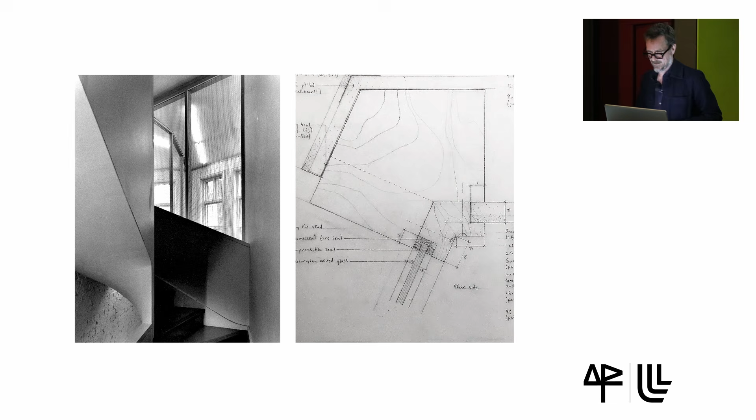It was also a project which was about the city, because this is a site sitting on a high street in Clerkenwell, but by lighting the ceiling in a certain way in the direction of the plot, you can see from the street that the plot is at an extreme angle from the street itself. In other words, the interior describes the consequence of the urban block being quite distorted.

And in the interior, a mixture of glass and mirror with these lights create a very complex upper level with a very concentrated lower level. Views of the street, views of the outside are mixed with views back into the space. It becomes a very complex place in a very small project.

So back in 1997, when that project was made, reuse wasn't really a word, an expression that we knew. The attitude to the environment was an inbuilt feeling of how to work responsibly. Not like today, where it's an obsession.

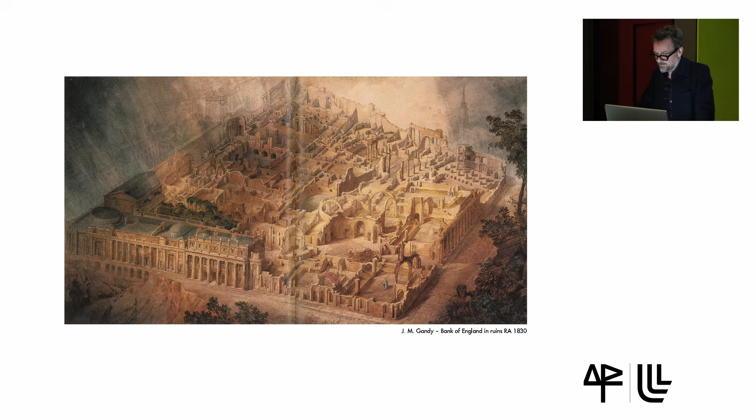We need as architects to define a conceptual frame in which to understand what your reuse project really is. And historically, approaches to reuse or transformation or restoration, Umbau, let's say, have reflected wider ideological attitudes. I personally think it's really important to understand the origins of things as an architect, because I find it helps me understand my position within a cultural debate. Not just about the local argument, but to understand that we are part of a big continuity of cultural ideas.

And in the 1850s, John Ruskin advocated conservative restoration. He was ideologically opposed to reconstruction. He believed that protection was a better strategy. Ruskin defended the aesthetics of the ruin, the patina of weathering and collapse. He saw restoration as a destructive force that effaces the sublime effects of time. It's a position that relates very strongly to the picturesque. The picturesque I have in my bones, you know, because of my Anglo-Saxon heritage.

This is a painting by J.M. Gandy of John Soane's Bank of England. John Soane was the third architect who, over a period of nearly 30 years, added and adjusted this huge urban project in the middle of the city. But he enjoyed presenting this institution of power as a ruin.

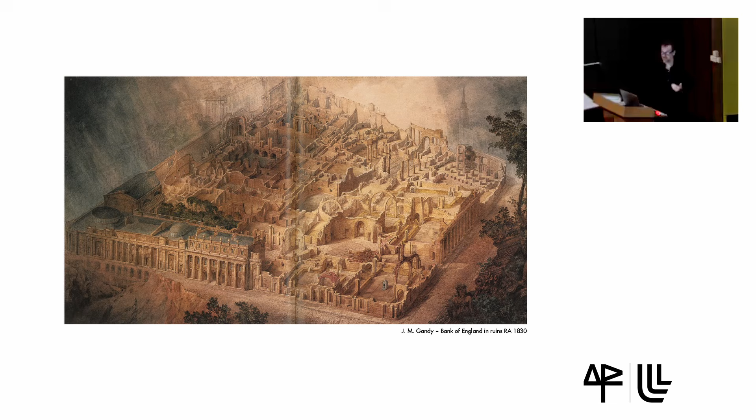I think I have this instinctive affinity towards the picturesque because I'm from London, and London is a city that is really fundamentally rooted within ideas of the picturesque and also conversely the mercantile. There's this interaction between the formal and the informal, and the attention paid to a sensorial experience rather than rationalism. The picturesque movement, by the way, emerged as a reaction to French rationalism.

The sort of empirical absolute truth of French rationalism was, as always in the history of architecture, you know, someone says this and 10 years later someone says the opposite. And picturesque was presented as another way of seeing the world, in a rather more naturalized, albeit composed, naturalized way.

But continuing with this historical step by step, around the same time, of course, the famous argument or debate with John Ruskin was with Eugène Viollet-le-Duc, who championed creative restoration. This was a way of re-establishing a building's finished state, whether it had ever actually existed at all. The addition of new layers was allowed in his doctrine, as long as they were an expression of their own time. So in the many projects he made, restoring churches, he advocated that it was important to express the new work as some kind of representation of the moment it was designed.

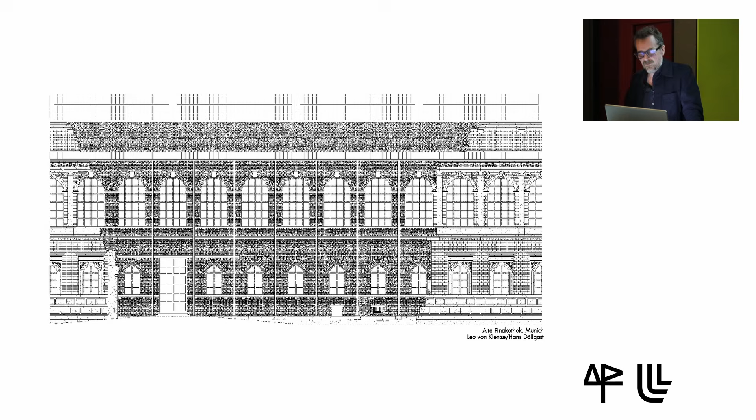Hans Döllgast's interpretive reconstruction proposed a subtler approach. These are drawings of my students actually, but this is Munich's Alte Pinakothek, a building that I'm sure you know, and if you don't, you should. Originally designed by Leo von Klenze, a big architect in the 19th century who built so much of Munich. The gallery, it was a museum, of course, was partially destroyed in the war, and Döllgast was commissioned to reconfigure and, in a way, repurpose the building.

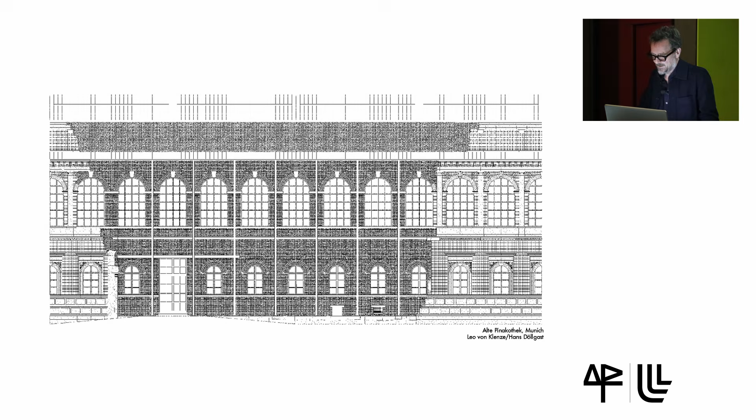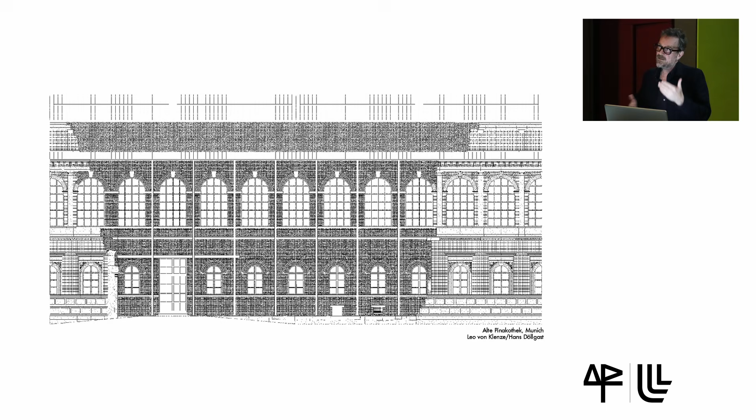Germany had almost no economy after the war. So this is the best that you can do, reusing bricks, using steel pipes for columns, establishing, you could say, the best possible relationship between a grand, noble classical architecture and where the German economy was then.

And yet, within the city, the building seems to be the figure that is known, that was known. So the project somehow becomes a memorial to destruction, or rather, it's both that and a historical reproduction in a certain way. But he protects and makes sense of all the layers of the building's life. And as a result, a new building emerges from the remains of the old, the old that includes its history. So the building stands as a sort of witness to all its past, whatever has survived.

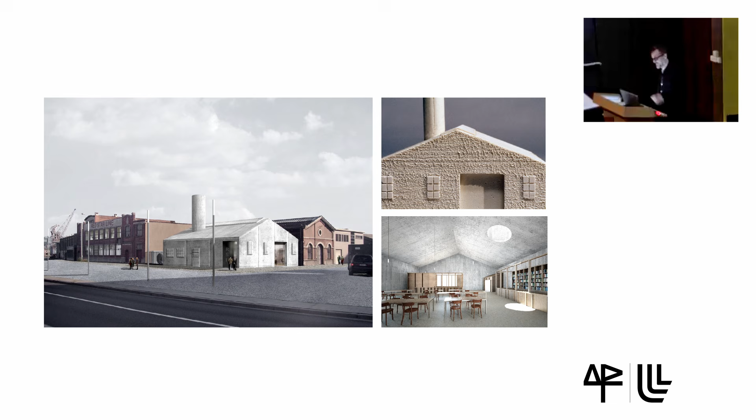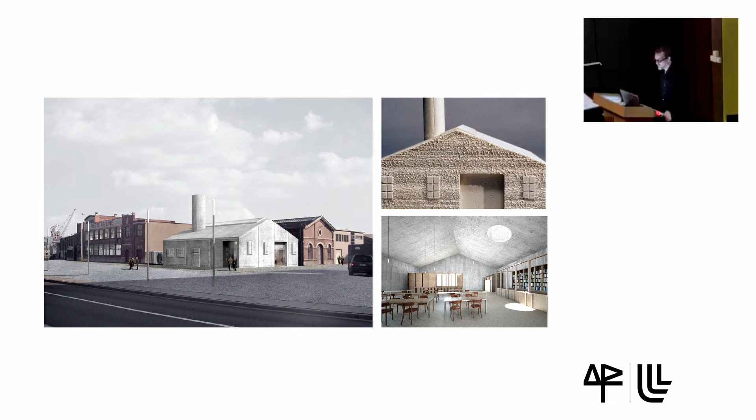Three buildings you can see on the left-hand side. But in the foreground, you see a shed, in fact a shed in concrete. All the buildings were listed, they were protected. But this building was literally falling down. There was rain and air running through. And our idea to restore the project was to cast the existing building against concrete and then dismantle the existing building. So on the right-hand side, you see the facade, where, of course, there's a very strong influence of Rachel Whiteread's work. And on the right-hand side, you see the interior of that space.

The old chimney became a light well. This became a kind of social space. It was exploring the idea of casting at every level. So casting a building, but also casting furniture. This is a space that had to be, let's say, a permanent memorial to the past, but also a space for appropriation of events and performances and things like this.

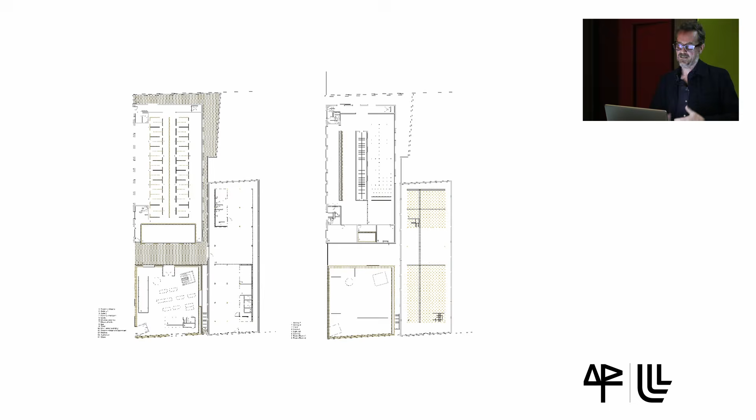I won't talk in great detail, but to point out that from our point of view, everything that we added would be a cast. And so that meant the building scale, but it also meant the level of infrastructural furniture. So for example, on the left-hand side, you see a concrete cast bench that was both reminding the visitor of the sequence of events the emigres would have to go through in the process of being checked, but on the other hand became a kind of background to a number of new uses.

Another project in 2002 was the renovation of the Upper Lawn Pavilion, a weekend house of Alison and Peter Smithson. Very important project to us and to many others, it seems. But there, when tasked with how to restore the building, we had to dismantle the building piece by piece and then remake it.

And from early conversations about adding double glazing and replacing materials, came a project that did none of those things, but literally took things down, cleaned, removed the elements that had been added over years by other owners, replacing the glass with single glass but higher energy efficiency, integrating heating in the floor that you couldn't see. In other words, we tried to make it, or we did make it more comfortable, but our work was completely invisible.

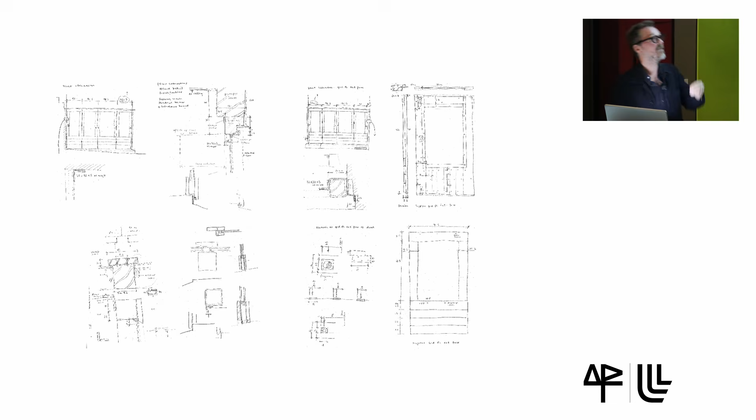But what I find interesting about the project is, here the sketches, how much we learned by dismantling a building. For example, we learned on the right-hand side, when we started to draw the doors and started to take them apart, we noticed that the doors are very conceptually considered. So unlike a standard door that would have a solid frame with a rebate, the whole door is made of 2 planes, and one plane is just shifted from the other to create that stop.

You know, it's nothing to do with old craft. It's to do with modernistic ideas, contemporary ideas of how to put things together. Very interesting and exciting, many things that we learned on this project.

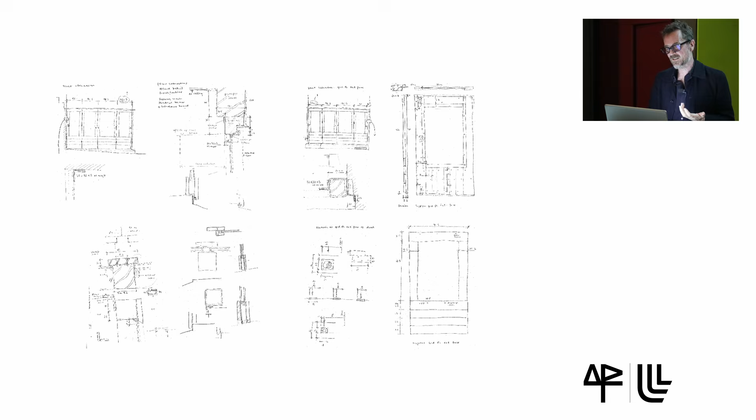But when it came to the decisions about what goes and what stays, I revisited the building recently, and I was given access through Drawing Matter, the drawing archive, to all the drawings that were made for this project. And it reminded me that we made decisions about what we kept and what we didn't, and how we organized things in a way that was a sort of fiction.

You know, we chose a sort of time of the life of the building that we converted it back to, but then we changed a few things here and changed a few things there. In other words, we invented a completely new narrative for the project. Not so consciously, but instinctively.

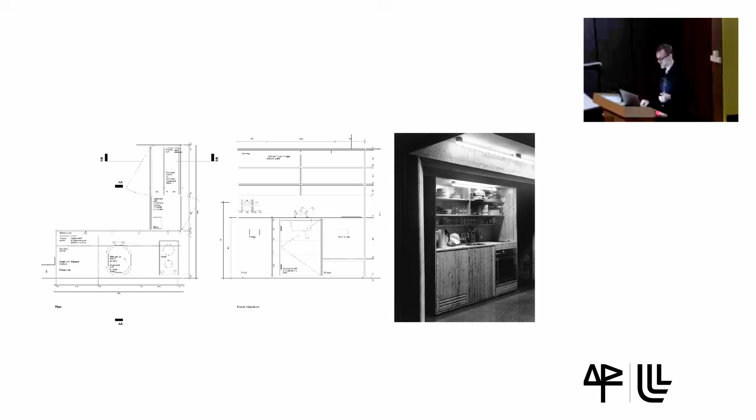We had to add new furniture that was made in tri-board, sort of strong plywood, that reflected something of the old, but was constantly adjusting itself to its new use. And then we made this table that was a real representation of a social space that was a very important part of the daily life of the building.

I want to show 4 projects. And in the background, I want just to say that if you're willing to listen, buildings will whisper things to you.

Everything okay so far?

Good. Of these 4 projects, I'm going to show 2, say, smallish projects, 2 bigger projects, because I think this theme of transformation has a very strong connection to scale. This is the City Library in Blankenberge, in Flanders. It was actually the first project that we were successful in competition in Belgium. It was the beginning of a very beautiful relationship, which continues today.

The City Library existed by the railway station, and there was an old school building that was much loved. Blankenberge had a very unfortunate relationship to Ostend, because Ostend was heavily bombed in the war. And when the German bombers, and indeed the English bombers, wanted to get home and fly fast, if they hadn't dropped all their load, as they turned to head back, they dropped the rest of their bombs just so they could fly faster. And a lot of them landed in Blankenberge.

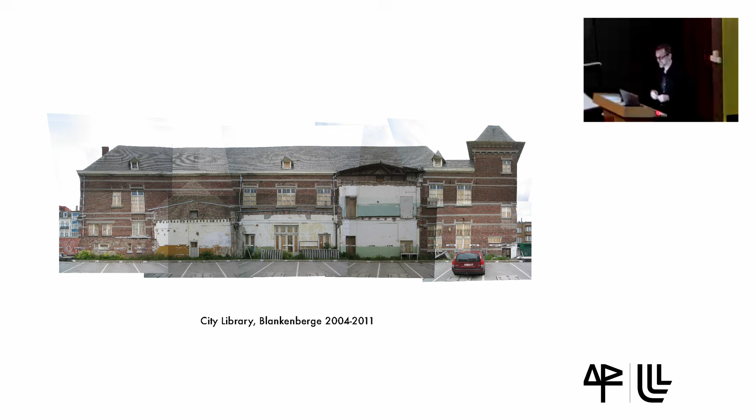So poor old Blankenberge, which is a very sort of sleepy seaside town, got absolutely destroyed in the war. Really sad story, but by the way, just another reality that no one ever talks about. The consequence is that there were fragments left in the city, and this building, which was a well-loved school, its noble facade, which was heavily protected, remained, but the buildings either side of it in the street were destroyed, and the space behind was removed completely by bomb damage.

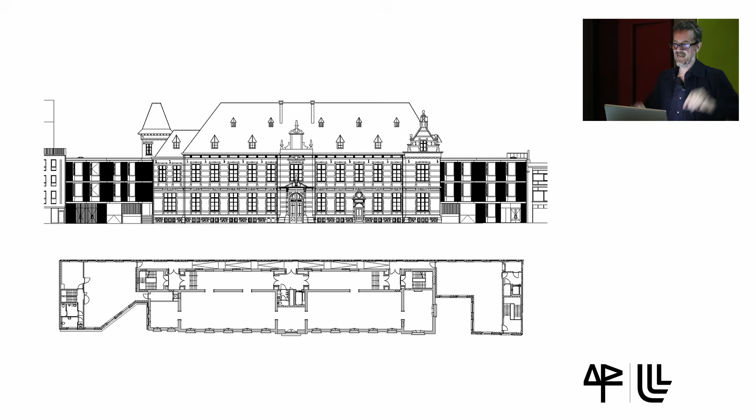Here is the plan. You can see at the back the ramps that link and connect the central lobby and then these two cores. And on either side, you see that we added two buildings that have the scale of the street side; they create the two heads of the circulation space at the back.

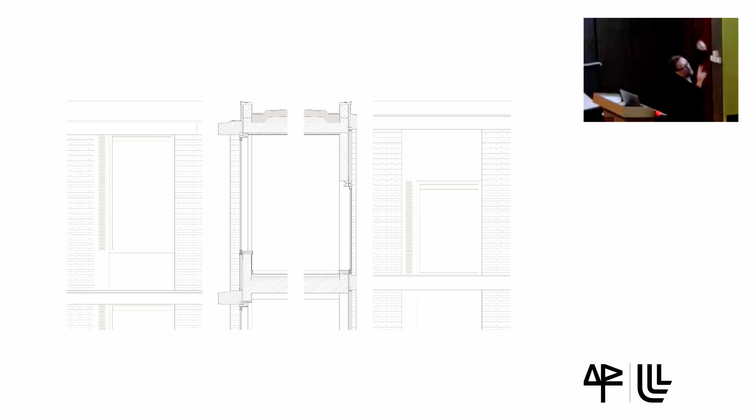So on the left-hand side, you have a very compressed facade, and on the street face, facing the city, those same elements are just pulled apart to give greater depth. So it's the same components, but the spacing is a bit different. I thought there was a section. Oh, can you see that? Yeah. There you can see on the right is the back, on the left is the front. The consequent differences, and you can see that the window is just turned upside down.

Now, this is a device to deal with the fact that the levels were completely different across not only the existing building, but the new buildings that we added had to provide access for the car park, and so had headroom issues which didn't meet the levels of the existing building. So this device of the ramp plus this treatment of the facade gave us continuity of the facade that relates to the historical facade, but at the same time, the level of the interior is able to be accommodated. So it's a very tolerant idea of a facade.

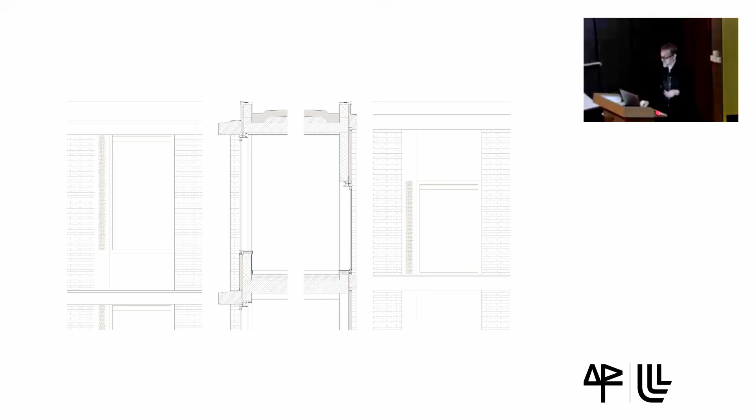On the interior, these are the existing spaces on the right-hand side, our work. We understood that the interior was a noble shell, and our first task was to reinstate a certain character that, let's say, the citizens of Blankenberge might recognize from their memory of this very important main school building in the town.

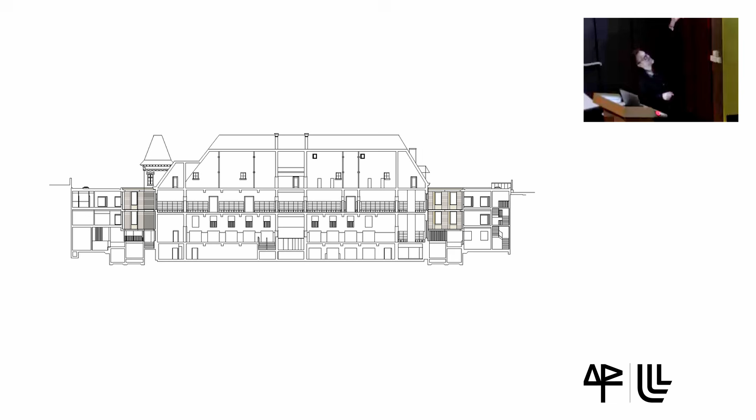And it was organized by using the roof space for the non-fiction department. The fiction was on the first floor, ground floor was public reading rooms, and the basement was an auditorium and storage, with offices for the librarian here and a children's library in the other new building. You can see how we just reappropriated what was there.

And you can also begin to see on the left-hand side that the idea of a library was always slightly secondary in our mind. The first step was to reinstate the noble character, and the next job was to make it a library. But we always imagined that the library was a transient use. It was the reason for the competition, but we were making a building for 150 years.

And I'm not sure if a library will be like a library that we know in 150 years' time. So the only thing that's fixed is this piece of furniture here. The rest of the library is added in lightweight pieces. So in a way, it feels temporary.

On the ground floor, this is the entrance space. And you have a combination of light, filigree curtains, handwriting, that is a very low scale, in a very big building. When you sit in the window seat, you look to your right, and there's some words written, poetry from a local artist, a local poet. Just a small moment between you and the building. No one else knows you're there, that's it. There's a moment of intimacy within this kind of large project.

The second project of that similar scale is a refurbishment of a very complex set of buildings to make an undergraduate business school in the East End of London. We call it Hult because this is the name of the owner of the school. The project really was about appreciating that everything is relevant. So on the left, that's the existing.

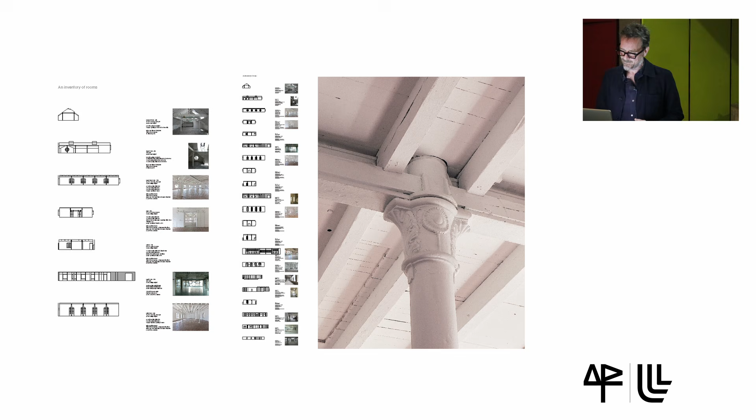And we show this picture on the right because there's an incredible physicality to this building. There was a cast iron structure, timber floors, everything painted, over painted, layer upon layer. And we said to ourselves, the school is there. We just need to allocate uses to the different rooms. But how do we intervene? How do we approach the idea of adding? Because it has to have furniture and classrooms.

And we were inspired by the idea of carpentry, meaning that everything we placed in the building would be made of carpentry, sawn. And depending on the scale of the piece, the finish and the detail would be appropriate. It reminds me of these beautiful pews, the beautiful furniture that you see in paintings like the Saenredam and others, that they're sort of insertions, they're pieces that are installed in a big space.

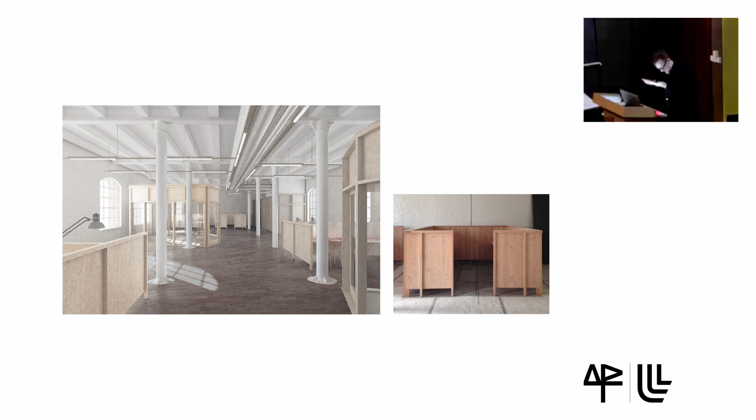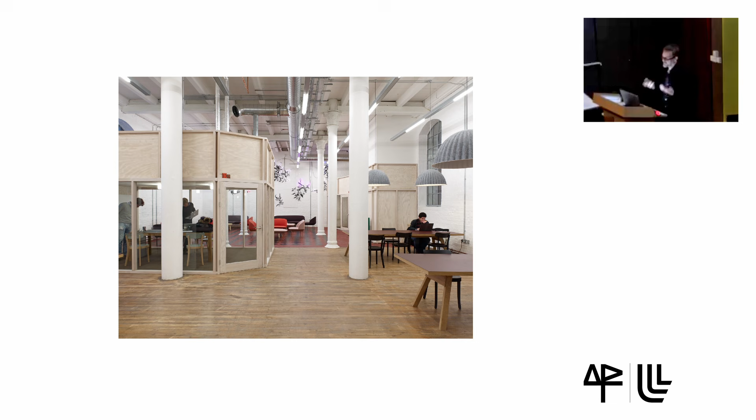So our idea was to do exactly that, to clean mostly the existing, to add some basic services only to the classrooms, which had to be climatized. But then to add furniture, like on the right-hand side, this is a prototype for a carrel where you do quiet study. The consequence was a sort of collage. And I must say, you could say bricolage. That's a very trendy thing to say. It was a few years ago anyway, bricolage.

There's a consequence with working like this. You have to be relaxed about form and actually enjoy the idea that things just come together, and that merging, that conglomerateness, has a certain quality. It actually takes a lot of thinking about too.

But here you can see, just as we knew that in the brewery there were large pieces of furniture, like we call them tuns, you know, the containers for beer and hops and water. And this is a building that was made for big pieces to be sitting inside it. So we added big pieces, rooms, studies, as a second scale after the scale of the building.

We inherited everything. So you see on the floor, it's a raised floor from an office with no carpet, and we just used that. And you can see the relationship between, on the right-hand side, what was the old office building and the brewery sort of stuff. And we added paint. Indeed, you may look here. This is a painted floor.

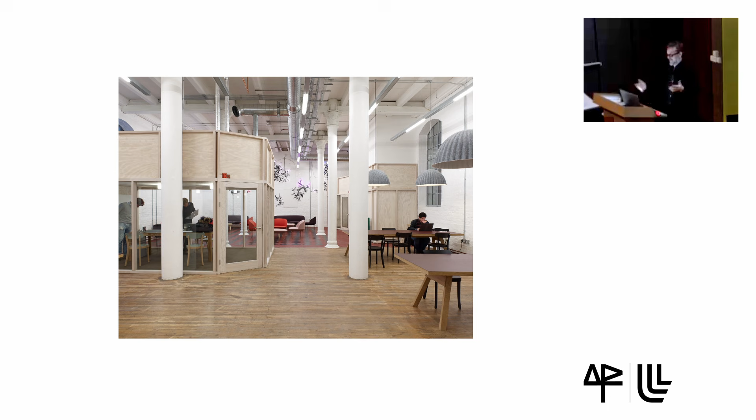What we discovered is that by making a template and using floor masonry paint on a big expanse of a really bad concrete floor, you create a certain scale, and it is a certain kind of quality. You can see another one at the back there, which was an existing red floor. We didn't paint the red floor, it was there, but we added a black square template, and in this case, a concrete floor that we added this white template.

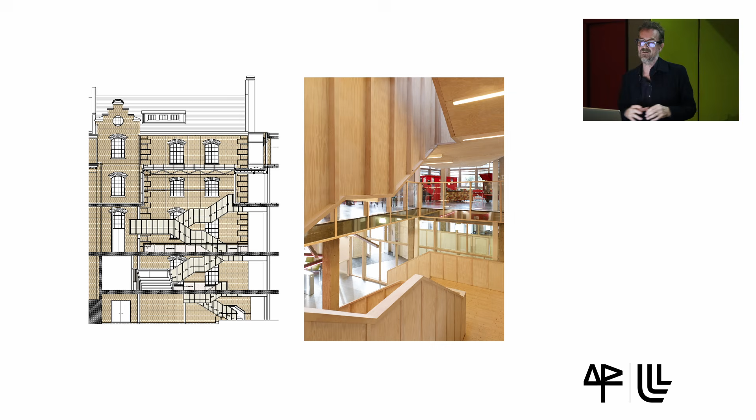The classrooms on the left were seen almost as buildings within the space, so they have elevations, windows. And on the right-hand side, the piece of carpentry that holds the whole project together, because the staircases were really hidden, is a new stair space. It's not just a staircase. The balconies are really broad. The wall of the stair is very high. So it's almost like you enter into a space and climb up the building. It connects all the floors that were never connected before.

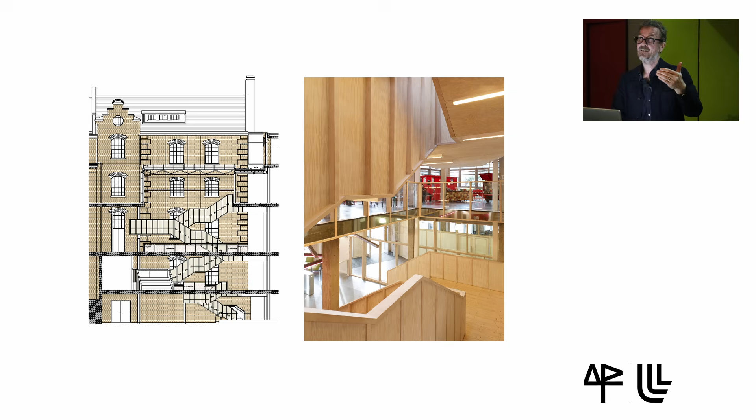And guess where it is? It's in the atrium that the Heritage Department wanted so desperately to keep as a sort of vitrine, to keep you away from the fabric of the brewery. And we managed to convince them that they should do the opposite now and bring the students close up, face to face with the existing building.

This light, this roof light, is an existing roof light that we lifted up by one story. It's all completely existing, but we just took it apart, lifted it up so that the stair could meet the top floor.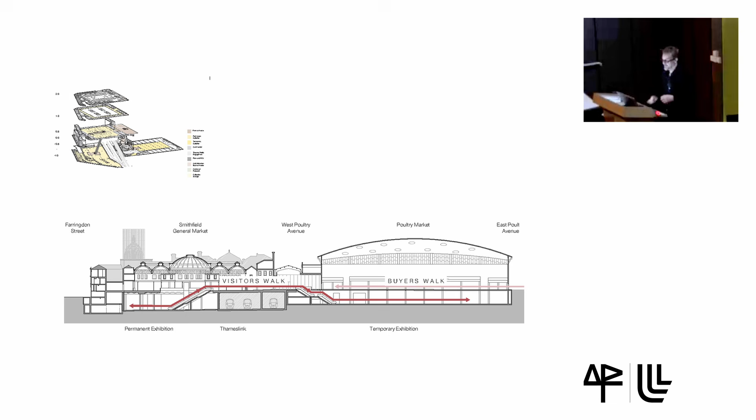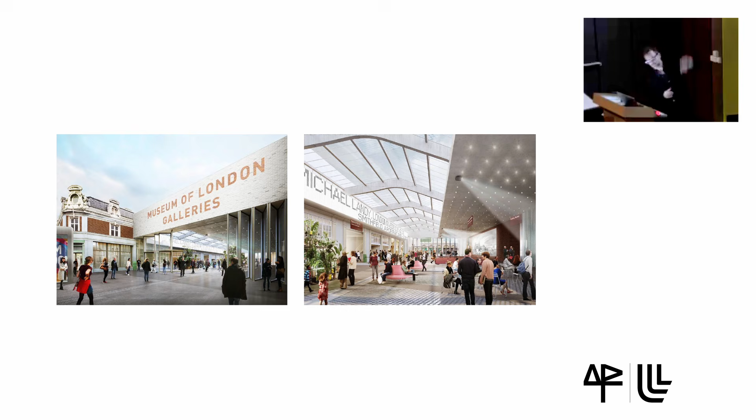Here you can see this extraordinary relationship of transport infrastructure, structural infrastructure, with the set of civic spaces and this important link. So the visitors' walk that would eventually extend into the next building was part of the axis character. This is the entrance, the new street. There's an extraordinary brick wall on the left that was just there. So, with the amazing abutment to the Victorian building, we kept that.

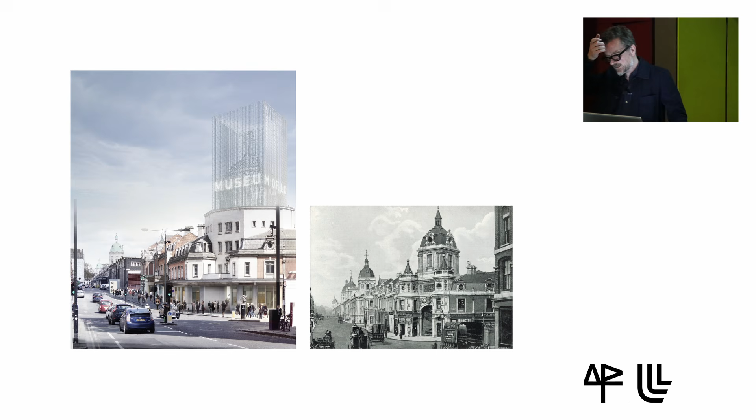And a museum needs to be seen. And we knew that we needed to find, let's say, some sort of landmark gesture. Otherwise, we wouldn't win the competition. BIG were against us. They didn't win either.

But on the right-hand side, you can see a cupola, because the original meat market had a series of towers, you know, marking the building. And the one on the right had been destroyed. You can see only the top of it was taken away. So we replaced it with a metal mesh with an installed LED assembly that would allow signage to happen day and night.

And indeed, because of the lighting, we could achieve a kind of kaleidoscope of movement and changes. So it became a kind of trace of what was there, but in the end, a kind of communication tool to spread to the broader aspects of the city.

The final project I wanted to show is a current project, the KANAL-Centre Pompidou in Brussels. It was a project that we won in competition together with two other offices, noA architecten from Brussels, and EM2N from Zurich. There was an international competition in which all of the entries were teams of architects because the project was so big. And indeed, the construction of the project is a team of contractors, two contractors working together to build such a large project.

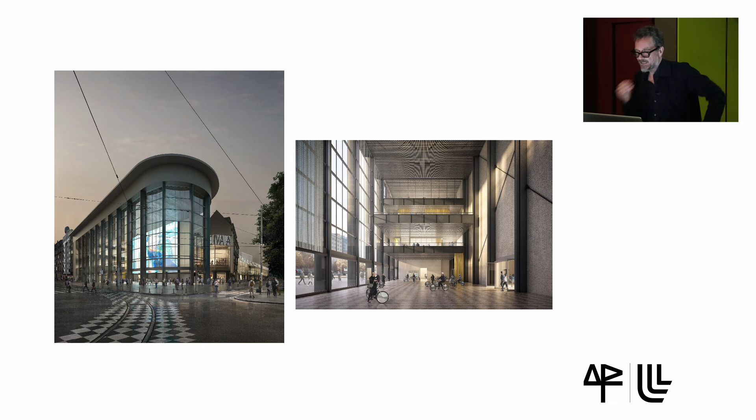I show it really to continue this point about how do you address transformation? It's not possible to imagine a single answer to the problem. Instead it requires a set of strategies that reinforce, in our opinion, the attitude of the existing building. This picture, in my mind, says a lot about the realities of reuse. To most people, we're reusing the existing building, but this is one of the spaces at the moment. Almost everything has to come off. And look at the extra structure, the infrastructure required just to hold the existing.

I show it because I think it's so important to have a kind of realistic idea of what reuse means. I find the topic a really interesting and challenging one, but nowhere near critical enough in what it really means, particularly at schools of architecture, where there's a sort of romantic idea of keeping everything as it is. And particularly in a public building, you simply can't do that. Our mantra was to touch the building as lightly as possible, to trust what was there. And I'll explain how we had to face the reality of that in a minute.

But at the heart of the project is this showroom. André Citroën moved his car manufacturing to Brussels as its headquarters. He bought the whole of the city block, apart from one building, and the back of the building was the garage in which they put parts together, and the front of the building was this showroom where he would display the cars on a main thoroughfare into the center of the city. And over the years, as the road itself was lifted to create a highway, platforms were added within the showroom, basically to lift the view of the car up. So when the road came up, you could see the car at your eye level.

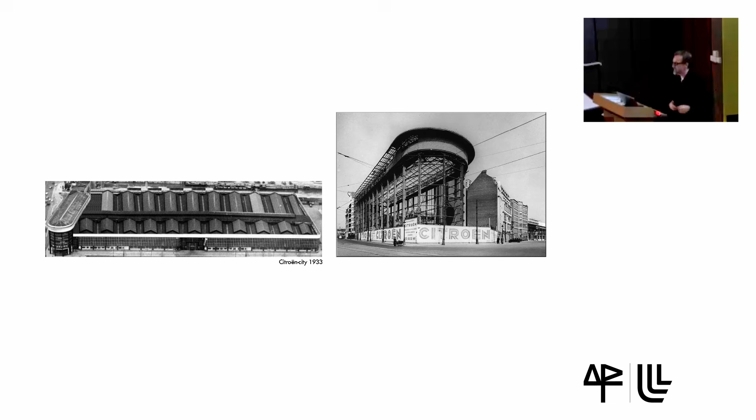Anna Viebrock, the great German set designer, worked with us as one of our critical friends. We invited a series of wonderful, interesting, intelligent people to join us at the competition stage, to provide a critique of the work we were making. She visited the building, a very modest person, but an amazing set designer. And she came out and we recorded this.

I like the poems of John Burnside very much. And in his book, such places as memory, there is one specific sentence that came to my mind after visiting the Citroën building. The house never forgets the sound of its original occupants.

It was a very powerful moment when we heard that. A reminder that it's not just fabric that you're dealing with, but you're dealing with memory and you're dealing with the sense of the past. The feeling that once a certain activity has happened in a building, it's not forgotten. It's there. It's in the roots. It's under the skin of the building.

We found that really powerful for us, and therefore the idea that this was a car garage remains very much in our minds when we're working on this complete transformation of use into a cultural centre and a new public space.

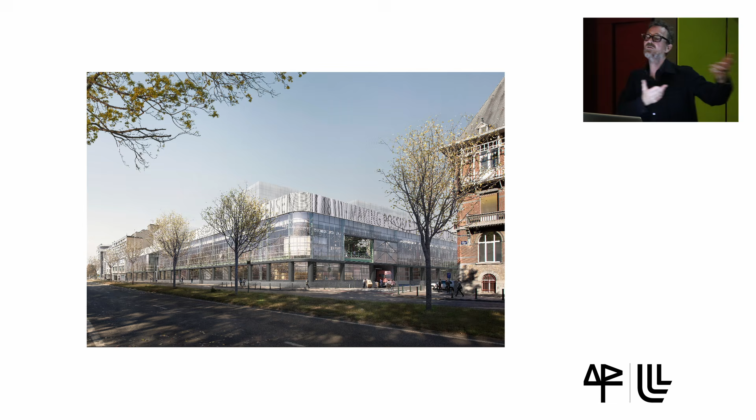But in terms of this idea of attitudes to transformation, the building was so large and complex that we had to, let's say, employ all those different ideas that I ran through earlier on in the lecture, from Ruskin, Viollet-le-Duc, even maybe the Venice Charter, but certainly ideas of Döllgast and others that were specific responses to a very specific set of issues that the building had.

And first of all, of course, our instinct was we want to keep as much as we can. We'd like to go back to certain original intentions, but what they were, we had to define. We weren't really interested in the historical value of the building, but more in the experiential value of the building, knowing that its origin was in a way a kind of dream.

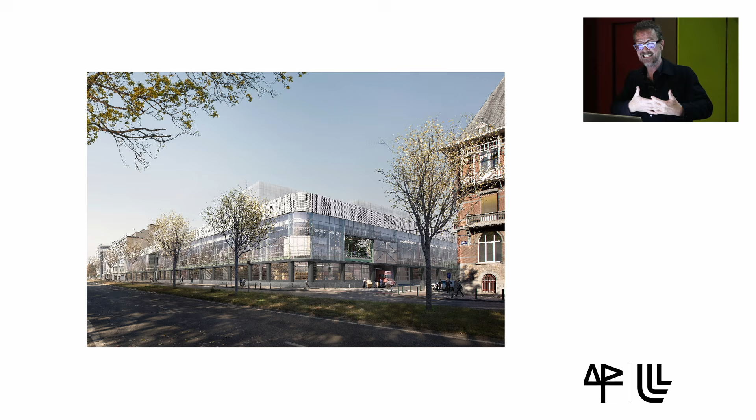So the horizontal fascia that you can see running around the existing building, added by us, reinforced by us, signified its identity, its charisma, and we extended it to enfold the complete museum with an information-rich and curatable interactive ribbon. You see it's running here, which is where the existing workshop is, but you see it continues going in this direction. Indeed, it goes across what used to be a building.

Because not only did we reinforce the horizontal idea of the building by adding a new strip, but we also rebuilt, reconstructed an imagined piece of the building. Because, as I said, this wasn't the glazing of the Citroën building. It was another building that Citroën owned, but he didn't finally complete the whole project. So we dismantled that building, it was actually where our first office was, and reconstructed the glazing. Of course, it's not quite the same, but it's almost a reconstruction, and then allowed the ribbon to extend.

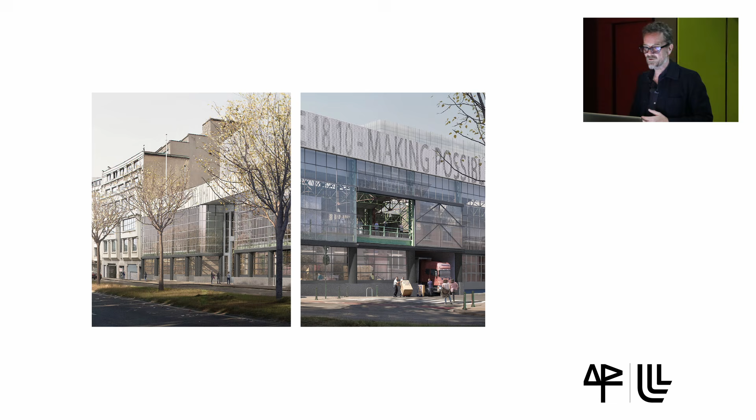So there's reconstruction, there's the creative restoration. There are, of course, interventions that have got nothing to do with the past, like in three places, taking the existing glazing out and replacing it with very large openings, sliding windows, so that large art pieces can be brought into the first floor directly from the street. And of course, fill it with ventilation and with a visibility of the interior on certain occasions.

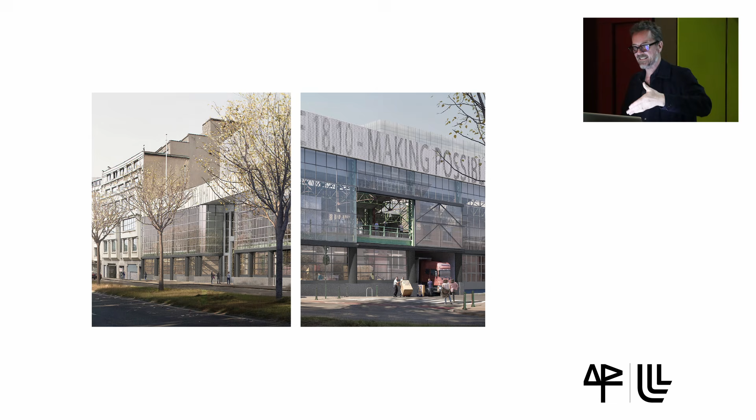So that's completely cutting in, adding in a very direct way. Detailing of the sliding elements has got nothing to do with the old 1930s glazing. But secretly and somehow the cross bracing has something to do with Kahn.

That's when you're meant to laugh. Okay.

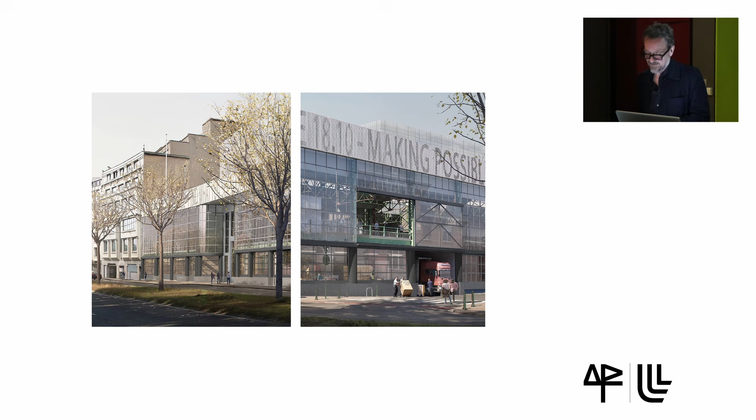That gives us 4 entrances, even though 2 are the obvious ones to use now. But actually, we pretty much believe that within a few years, the other one on the left-hand side is going to become really important because there's a big development going on that's at the moment just a building site. So we're anticipating a future, but reinforcing the existing spatial and orientation structure.

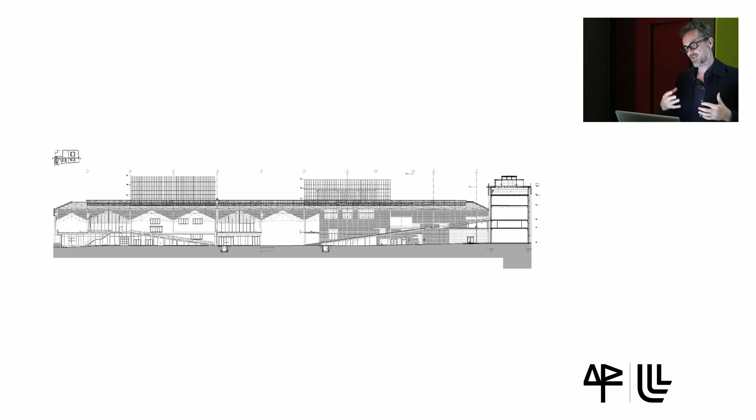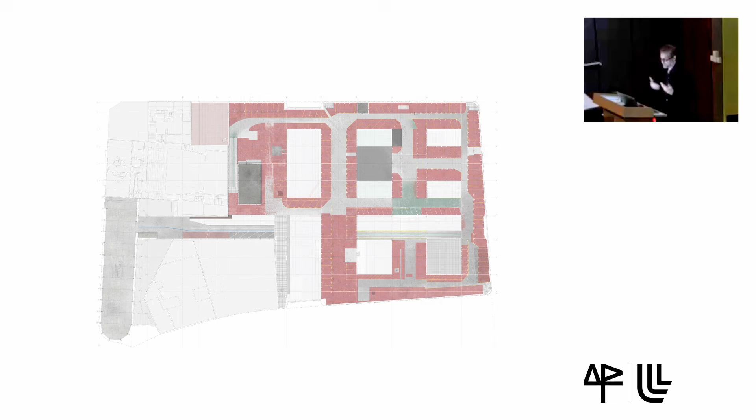As I said, our starting point was to trust what was there and to touch the building lightly. And when we first started working on the project, we got access to a certain type of photography in which you photograph the floor, the ground, which we could then piece together. And this is the piano nobile, the first floor that was added in the 50s as a raised platform, which we liked to keep because it brought you close to the roof.

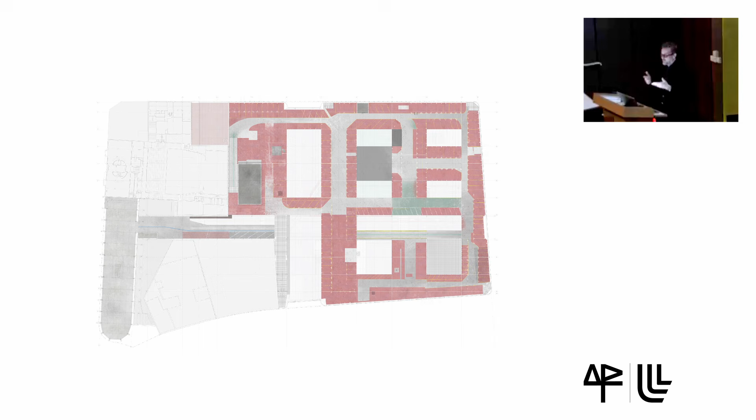And you can see the markings for parking and the different layers of paint, all done in an improvised way to reinforce somehow, give coherence to the different roles of the car park itself, of the building itself. And our intention was to keep this paint as a sort of trace of the past, just as it was, to keep the patina in a Ruskin type way, to keep the patina of the existing roof, where our intention was literally just to brush the dirt off and leave it.

The problem is that as a public building, the paint needed to be tested for toxicity. And when it was tested, it was seen to have chrome 6, not only in the steelwork, but in the floor as well. This is a toxic form of chromium, a carcinogenic substance that can cause severe health problems. So all the paint that existed in the building that was meant to be for corrosion protection was toxic.

This really affected our concept of not touching the building. The client would never accept leaving it because they would then open a public building that had toxic surfaces. And so we had to accept that it needed to be stripped. So all the patina of the building had to be taken away. The right-hand side is the consequence of that. The cleaning was very expensive to do because it has to be done in plastic containers, because it's so toxic. And then there was a prime paint.

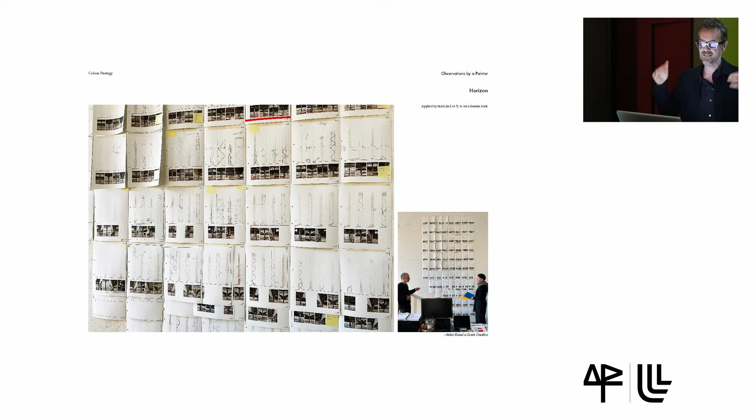And alongside that was our insistence on looking very, very carefully at what was there. And we then established a collaboration with an artist, Sarah Smulders, to help us develop the color concept. It became even more important once we realized we were losing the color from the existing buildings. And Sarah, who's a forensic artist, obsessed, I'd say, made an extraordinary document of every element of the building with our help, including establishing every color that was used from the 30s right through to the current day.

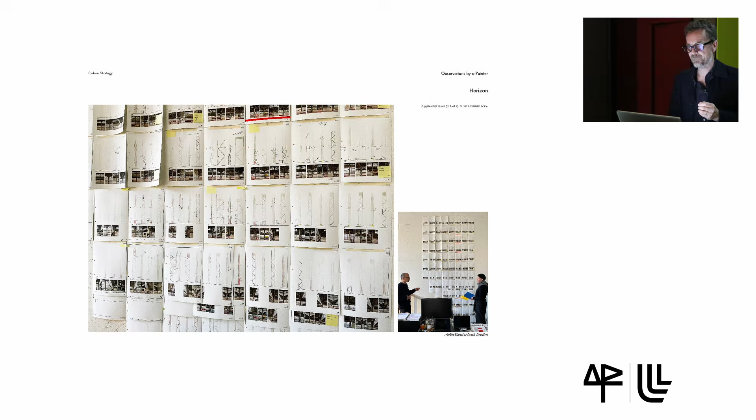And in her studies, she began to establish that there were certain datums that the paint of the existing building had established. And it wasn't through art that these were established, it was through necessity, that an area needed to be defined for the parking of a certain car that was being fixed, a set of cars. And a workman was told, can you just go and paint that area, please? Oh, here's a pot of paint that we got from the store.

And Sarah began to notice that the height of that paint related to the height of a man or a person, anyway, and of a brush mark. And where the columns were close to a step, the level of the paint went up because you could step up and get that level there. And she began to observe that actually, first of all, there was a datum, but that datum adjusted in a specific way. And it was related to the movement of paint, the movement of the arm, a very human aspect. And these observations have evolved into a manual for how to repaint the building.

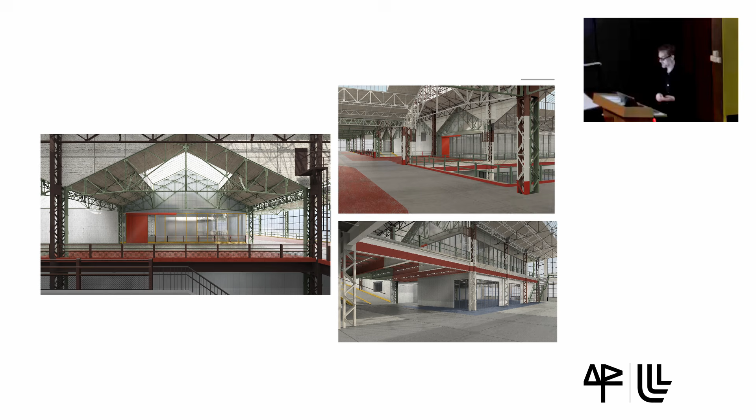Here are some early studies in which we are employing only the colors that have existed in the life of the building, but reimagined in a way and reorganized with certain different emphasis. But still there is this existing idea of a horizon that emerged from an observation of what was there. So there's going to be a brand new paint scheme for the project, but the scheme itself has come out of an understanding of how the coloring of the building has emerged over time.

Alongside the restoration and transformation, there was always intervention also, because how do you make a world-class museum out of an old garage that has no thermal qualities? Well, if you want to do it in an efficient way, you maybe concentrate the parts of the new building that need a lot of energy. And that's exactly what we did. 3 houses, basically 3 buildings, are inserted into the garage structure.

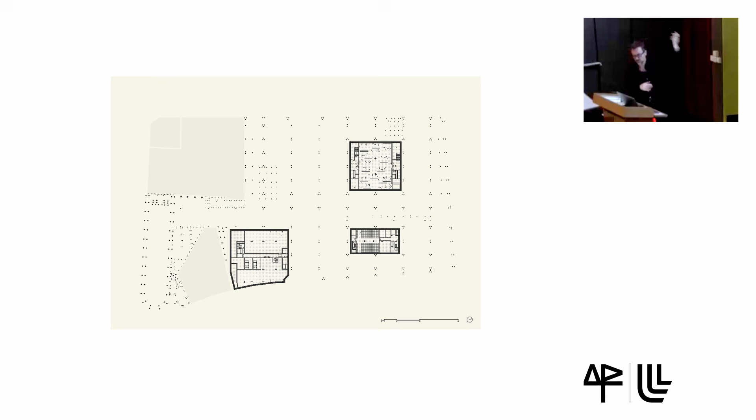Here you can see just the pile layouts, actually, with the basements of the 3 volumes that we add. Top right is the Museum of Modern Art. Bottom right is the Museum of Architecture. And on the left-hand side is what we call the Rassembleur, a kind of collection of cultural functions, including an auditorium and also the offices of the Fondation Kanal. It's an idea that, of course, has much precedent.

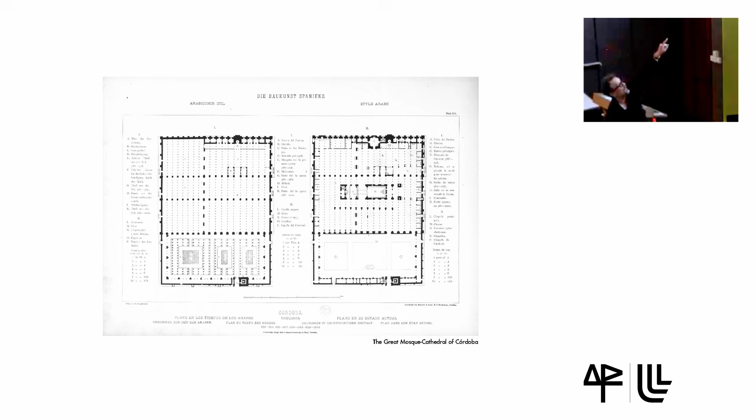This is the most wonderful building, maybe one of the buildings I'm most interested in, the Great Mosque in Cordoba, that was built over many generations in parts, and indeed was victim of various invasions and different cultural, let's say, overlaps and interventions, including the building of a cathedral, a Western cathedral in the middle of a mosque. Somehow it works. This is a landscape of columns and an arched landscape.

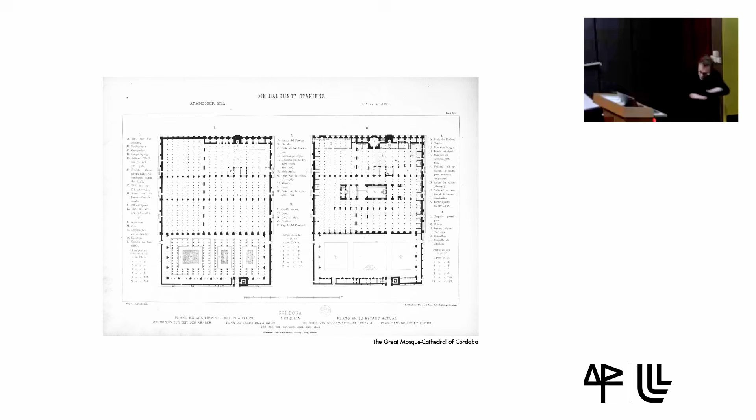By the way, the arches, the column heads are all borrowed from the Roman city in Cordoba. Almost everything, certainly in the first phase of the mosque building, are borrowed pieces from another set of buildings, Roman. So we have the horizontality of the mosque, and then the verticality of the Christian church that relies on top light, because in Christianity, God's up there, but in Islam, well, God's in here, and in fact, you need to feel that you're part of the earth.

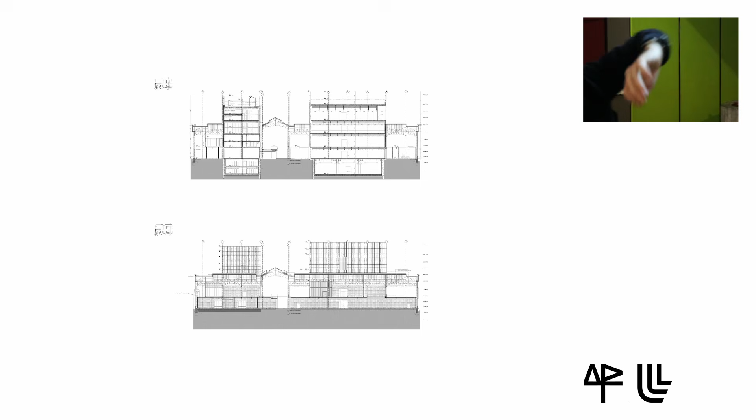That was a bit of an aside, just to talk about Cordoba. I don't really know why I mentioned it, but just to say, if you don't know that building, go and look at it.

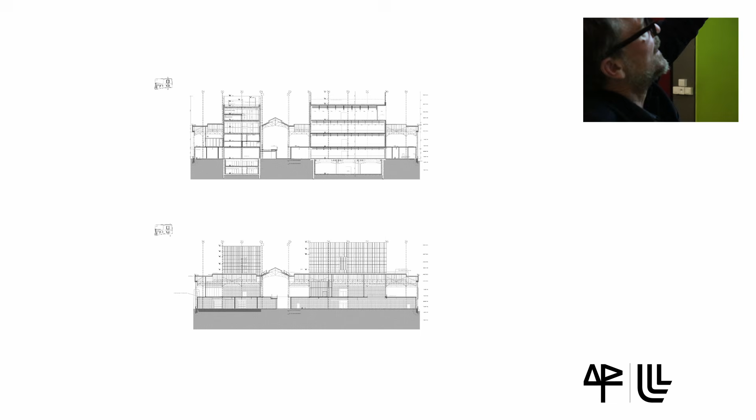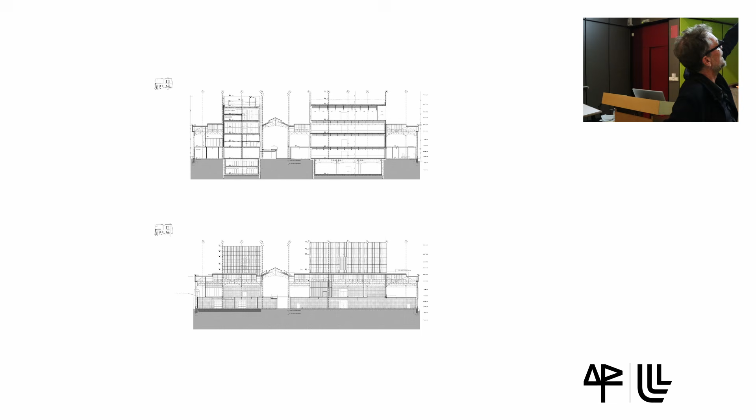Here are the sections. You can see the installed volumes that sink into the ground. On the right-hand side is the Museum of Modern Art with a 5.5 meter high basement gallery with no daylight. So it's an interior space. And then a construction of gallery floors, all of which are slightly different. And on the bottom, you can see from a distance how these volumes emerge out of the roof of the existing garages themselves.

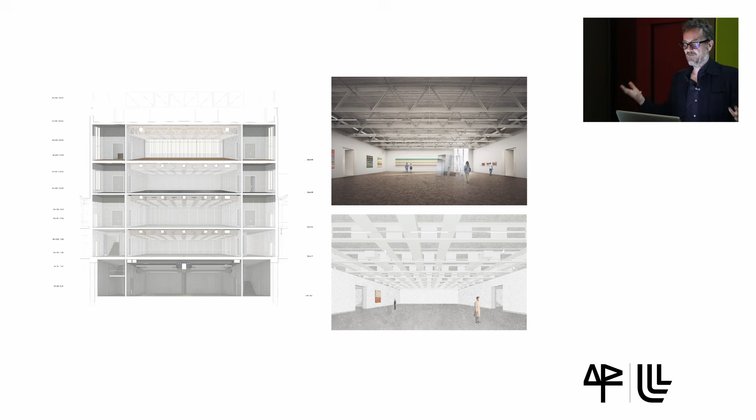The idea was that in this building, we would offer a great variety of rooms. The flexibility came from that choice of a broad choice of spaces. I think it's impossible to avoid energy within the transformation debate. And I don't mean just like, let's save it, but in a museum situation, there is a kind of astounding requirement to control the temperature of an interior space. I think museums of all architectural typologies are the most expensive for energy use, because, for example, in this case, or like the Pompidou, the main gallery has to meet 20 degrees plus or minus 1 degree. That requires a lot of kit.

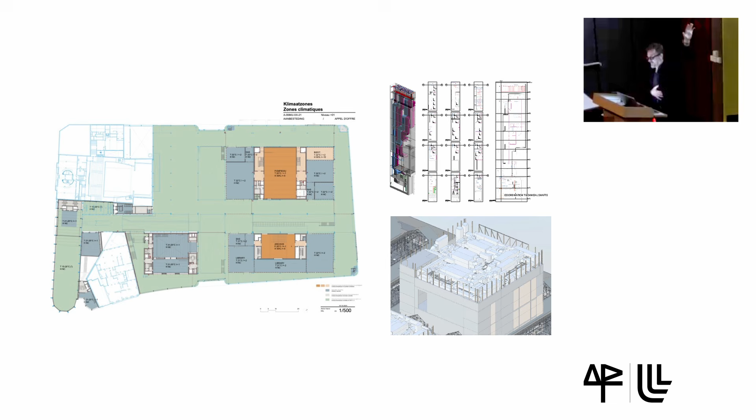So on top of the Museum of Modern Art, there's the view of the plant. And on the top, above that, the risers are absolutely crammed full of ducts. And I find that at the moment, and there's no sign of this changing, museums that have beautiful works of Vermeer and everything, and the Mona Lisa, require this type of control system to be able to display work. Only when museums and curators accept that they need to drop the standards are museums ever going to be a kind of environmentally responsive project.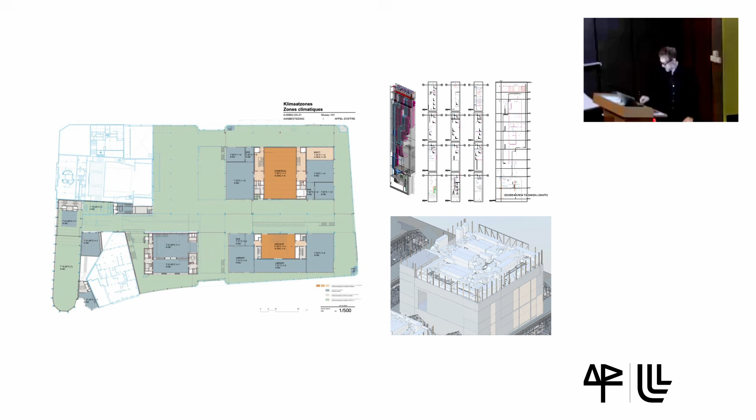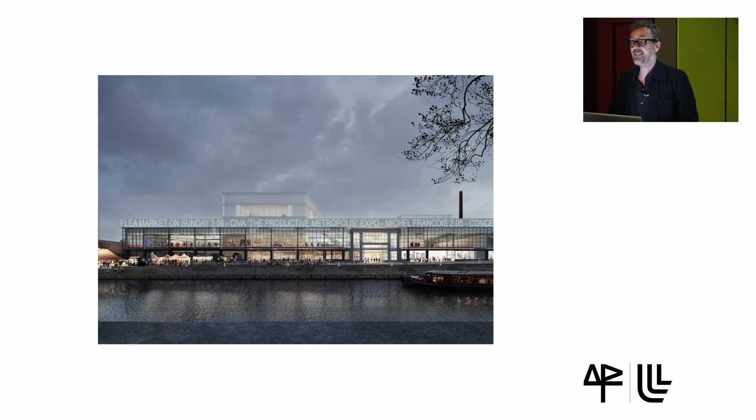So reuse is not just useful, it's necessary sustainability-wise, but it needs to be engaged with by all of us as architects, with cultural ideas. And our position is on the continuous line between the past and the present, looking for other meanings of originality and authenticity to go beyond pure materiality of the built relic, and also focus on other immaterial values and meanings that encourage a more experimental and experiential way of weaving the past and the present together.

I can't help feel that this isn't so dissimilar to the way that old buildings were treated until the end of the 19th century. I feel we have to be ready to abandon the narrow material definition of the notion of authenticity that prevails in the field of monument preservation as defined by the Venice Charter. We're not looking for what is closest to the original, whatever that means, the unique moment when a building arose, the way it was once conceived, but instead we're aiming to make history visible through a clearly selected lens.

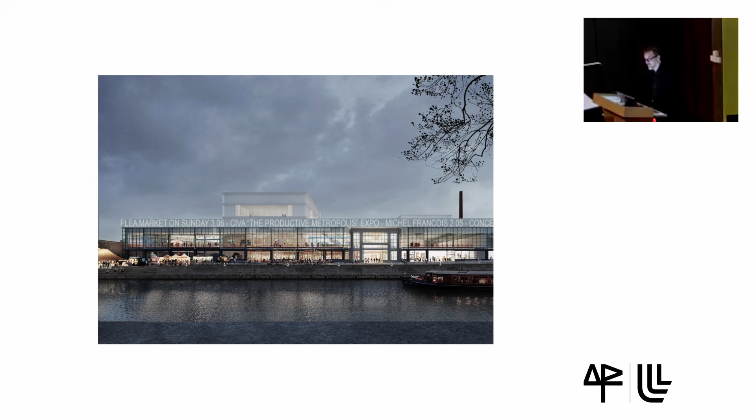The less attractive and the beautiful, the agony and the celebratory, the glory and the decline, the material traces of centuries of alterations, demolition, renewal. It's also okay to be nostalgic in a certain kind of way. And therefore, instead of one single truth, the narrative expands to several storylines at the same time. For this to happen, and for any of us to work creatively within the transformation and reuse debate, building codes need to catch up with our ideas, and we have to address the challenge of thermal requirements.